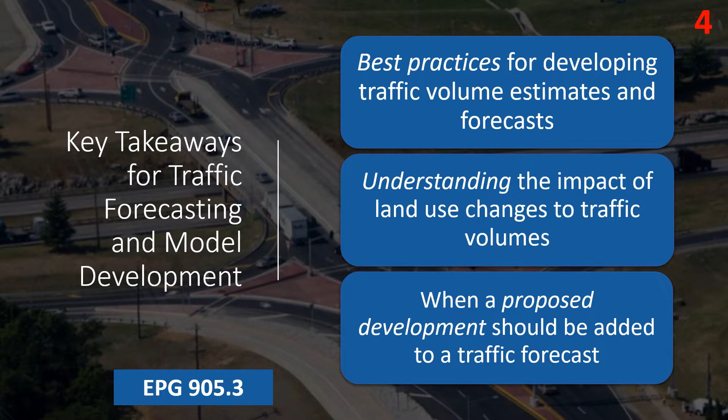To start, you'll need to understand the background of traffic forecasting.

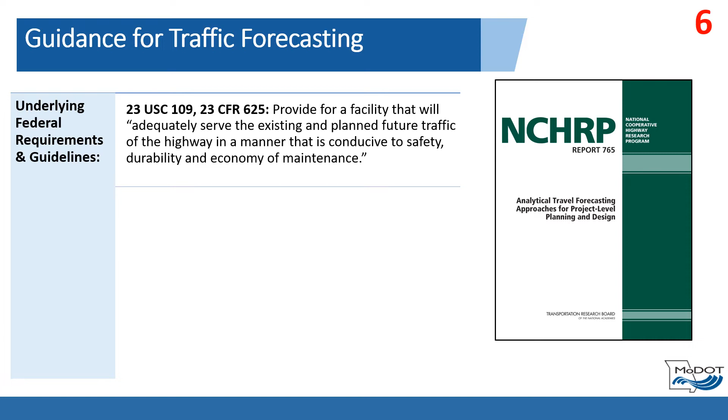Let's focus on a few key national sources for requirements and/or best practices for traffic forecasting, including FHWA and NCHRP. Additional sources are listed at the end of this video. Even more sources are listed in the MoDOT Engineering Policy Guide.

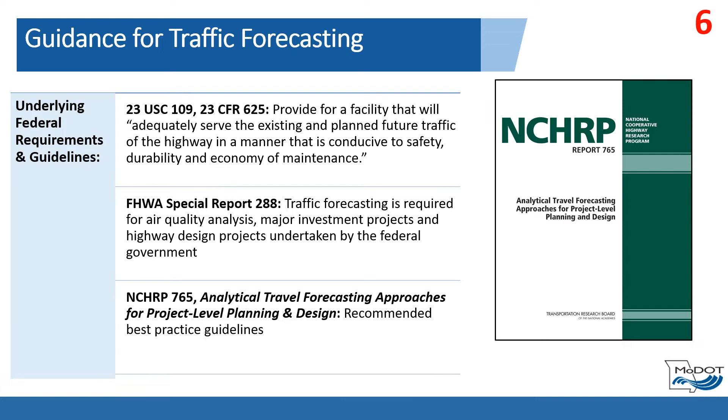Accurate and timely traffic volume estimates are crucial for ensuring the success of transportation projects through each stage, including Transportation Impact Analysis, or TIAs. Traffic volume-based measures deal with the quantity of use of transportation facilities. The quantity can either be calculated at a specific point on a transportation network or between origins and destinations. Demand is associated with a specific time frame anywhere from 15 minutes to a 365-day annual period.

Existing and future traffic volumes are necessary for most transportation projects and can be reported as daily volumes or hourly volumes. Planning and safety analysis projects are examples of project types where daily traffic volumes are needed. Operational analysis projects are examples of project types where hourly traffic volumes are needed.

Traffic forecasts are produced to assess transportation performance under different assumptions about transportation supply and demand. It uses existing traffic volume counts, historic traffic volumes, travel demand model projections, if available, land use plans, and socioeconomic data to predict traffic volumes and traffic flow patterns for a given year in the future.

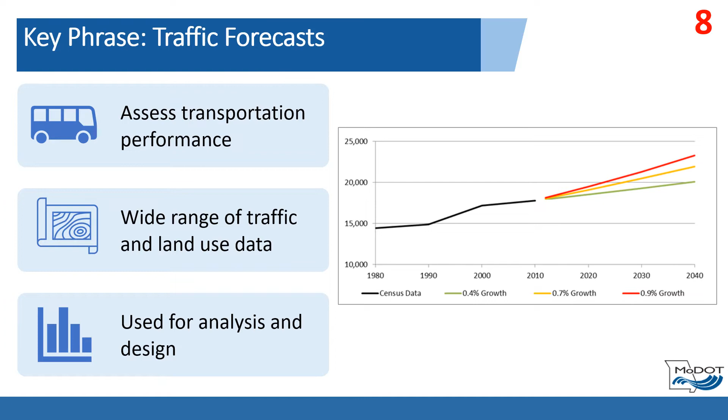Now that we've discussed the background of traffic forecasting, it's time to learn about daily traffic volume refinement.

AADT stands for Average Annual Daily Traffic. It represents the average traffic volume throughout the year considering typical traffic conditions. A true AADT is developed by using a full year of traffic count data, such as data generated from a permanent traffic counter, and dividing by 365 days.

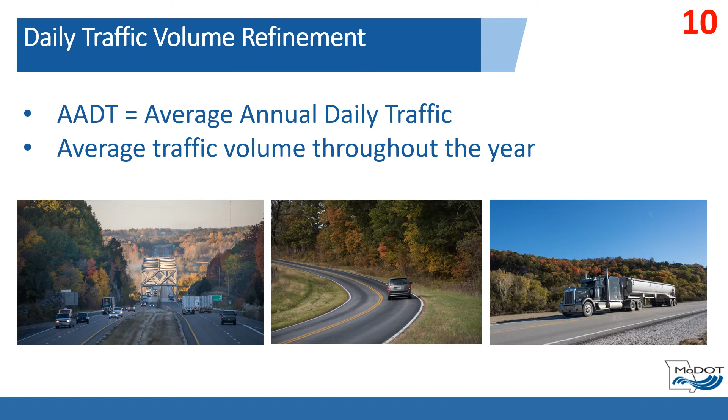However, due to the limited number of permanent traffic counters, short-term traffic counts, usually a 24 to 48-hour period, are often used. When raw short-term traffic count data is collected, it should be processed by factoring it into average annual daily traffic, AADT, using factors that can be requested from MoDOT planning. Short-term traffic count data is converted to AADT by the following steps: applying an axle correction factor, ACF, adjusting to a typical weekday daily volume, and converting to AADT.

Applying the axle correction factor, ACF. If the count method includes vehicle axle data, i.e. tube counts, then an ACF should be used to adjust the axle counts into vehicle counts. An ACF is developed from classification counts by dividing the total number of vehicles by the total number of axles.

Partial weekday adjustment. If partial weekday data was collected, then an adjustment factor is used to convert partial weekday traffic count data to 24-hour weekday daily traffic volume estimates, also known as average daily traffic, ADT. The adjustment factor is representative of the percentage of 24-hour traffic volumes that typically occur on a weekday during the time range specified, for example 6 a.m. to 6 p.m. for a 12-hour traffic count. The adjustment factor usually varies by the type of roadway facility, for example interstate, U.S. route, or state highway.

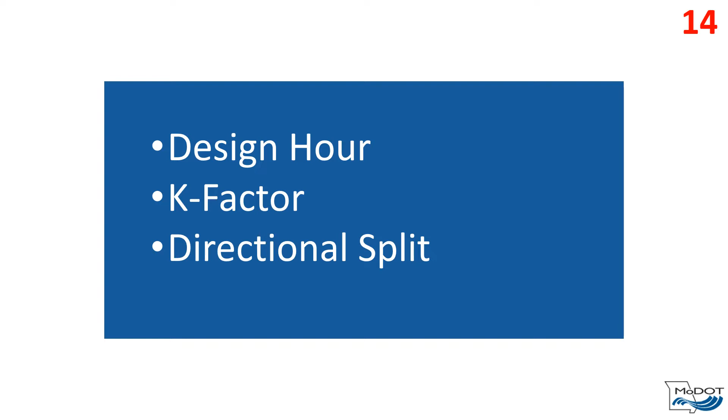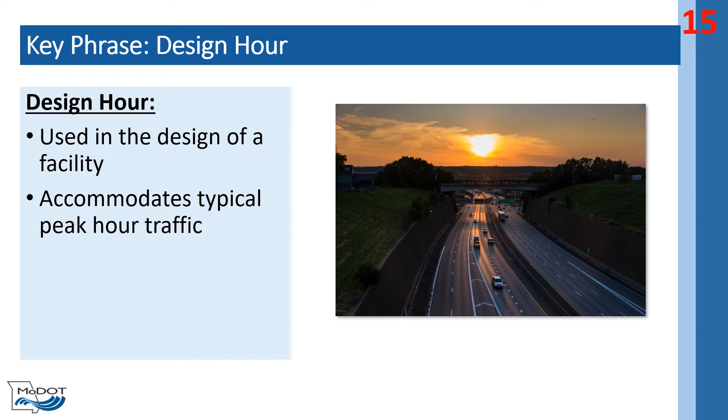The design hour is a high-demand hour with a traffic volume used for designing the geometric and control elements of a facility. Often, this is the same as the AM and/or PM peak hour volume. The design hour selected will allow the designed facility to accommodate peak hour traffic during most days.

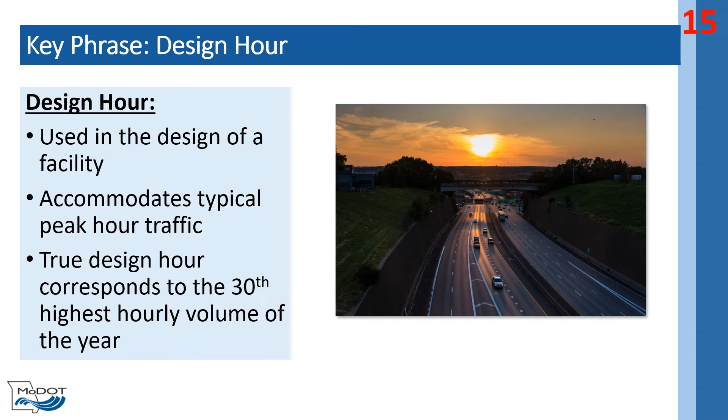The Highway Performance Monitoring System considers the hour corresponding to the 30th highest hourly volume of the year as the design hour, as determined by continuous counters. In absence of continuous counters, local jurisdictions can adjust their design hour based on local facility-specific traffic conditions.

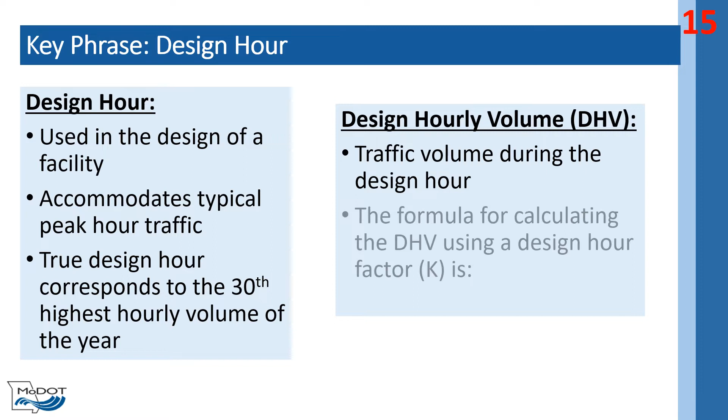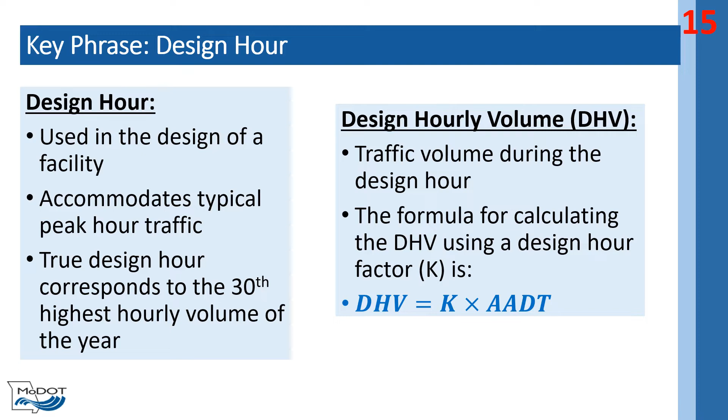The design hour volume, or DHV, represents the volume of vehicles that travel through a segment of roadway during the design hour. The formula for calculating the DHV using a design hour factor of K is DHV equals K multiplied by AADT.

Design hour factor, or K factor. The design hour factor, known as the K factor, is the proportion of the AADT, average annual daily traffic, that occurs during the design hour.

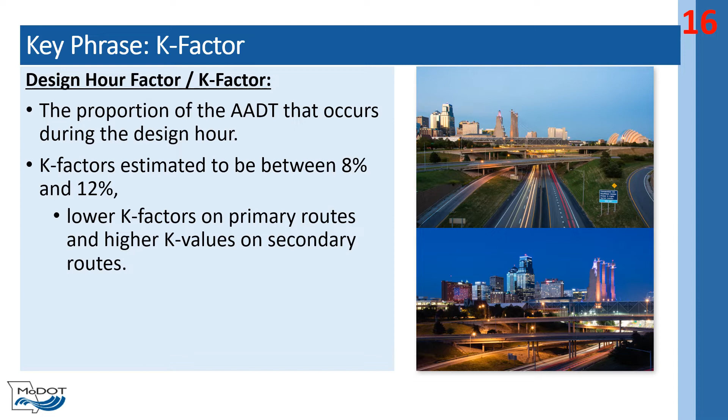K factors are typically estimated to be between 8% and 12%, with lower K factors generally occurring on primary routes and higher K values occurring on secondary routes. In the absence of available traffic data, a planning level estimate of K equal to 10% is sometimes assumed for high-level sketch planning projects. Remember, the formula is K equals DHV divided by AADT.

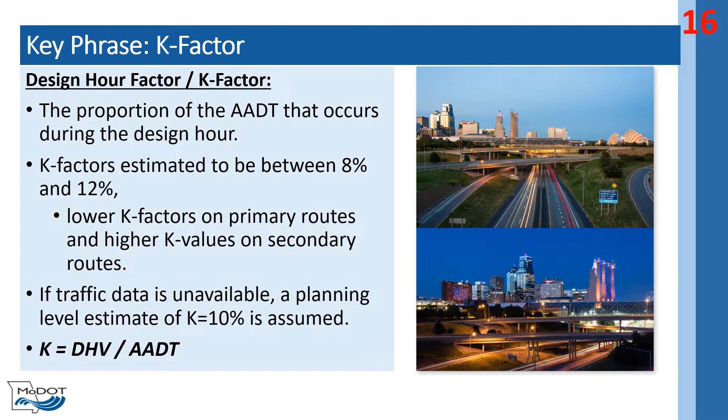Another key consideration is the peak hour directional split, also known as the D factor. This is the percentage of the total two-way peak hour traffic that occurs in the dominantly traveled direction. For instance, a PM peak hour 55% D factor in the eastbound direction on a roadway means that 55% of all drivers in the PM peak hour are headed eastbound.

We discussed the design hour traffic volume refinement, so now we are ready to learn how to balance traffic volumes.

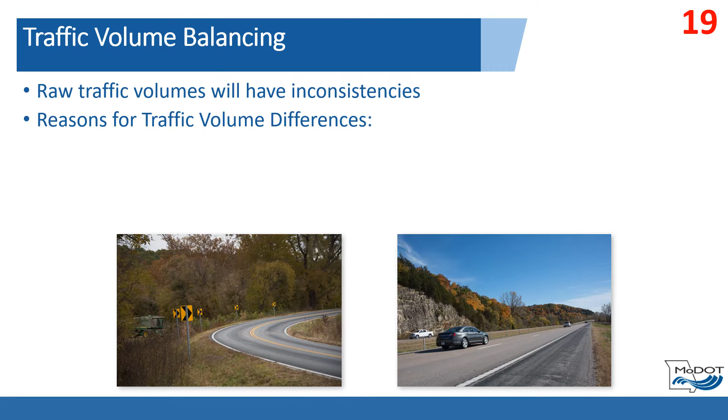It's important to understand that raw traffic volumes along a corridor will have inconsistencies and differences when initially tabulated. Some typical reasons for base year traffic volume differences are other intersecting roadways along a corridor and traffic data collection method variations, for example, data collected on different days, counter error, and unexpected traffic incidents.

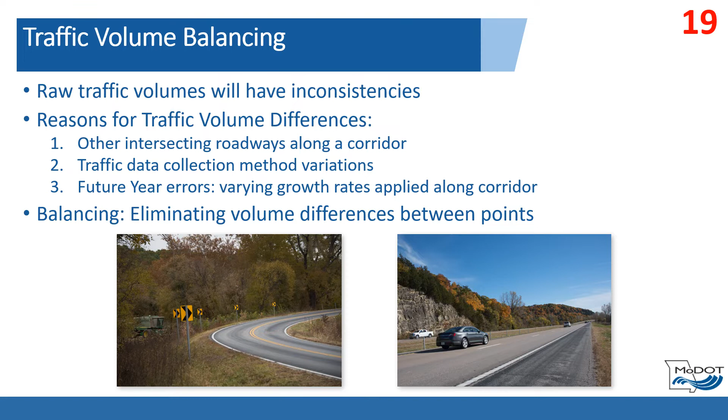Future year traffic volumes will frequently have inconsistencies due to varying growth rates applied along the corridor. So, you will need to consider how to balance this information. In this case, balancing traffic volumes means eliminating the traffic volume difference between multiple points completely.

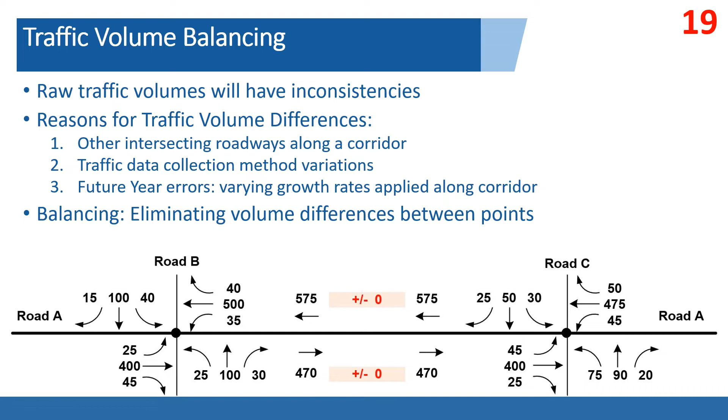For more information, visit the MoDOT Engineering Policy Guide. General rules of thumb are covered on the next slide.

General traffic volume balancing rules of thumb are: understand the locations where data is more likely accurate, defensible, and verifiable by multiple sources. Rely on those data sources to carry forward traffic volumes during balancing. Balance the project's needs between realistic results and efficient calculations. Be context sensitive to the level of analysis being completed and the appropriate level of effort and detail needed for traffic volume development and balancing.

Determine level of error and if new data is needed. If the volumes are off by 10% or more, then review the data to determine if errors have been made in the data collection or processing.

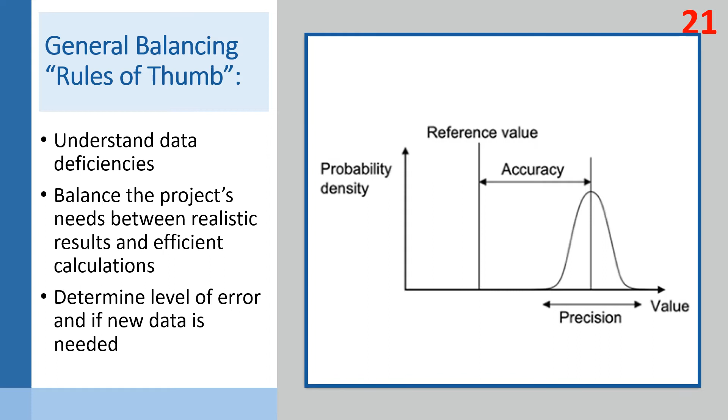Once you have balanced existing traffic volumes, you are ready to start projecting future traffic volumes using different types of traffic forecasting tools.

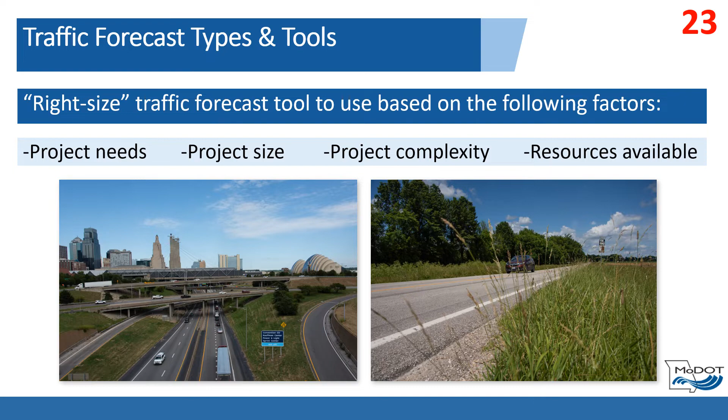It is important to understand the most appropriate tool to use for a traffic forecast. Consider whether it is a planning or design project, and consider the 4 factors listed here. The NCHRP 765 lists the 5 most common forecasting tools.

3 of these tools are growth rates, trend line analysis, and time series analysis. Each of these tools emphasize different things. The growth rate tool applies a constant growth rate over time. Trend line analysis uses historic traffic volume data to generate regression lines. Time series analysis extrapolates trends over time and can be either constant or variable in growth.

These tools should be applied when no travel demand model is available. Historic growth in the study area is stable and expected to remain that way in the future. The project is small and low complexity, and resources and/or time are too constrained for more in-depth analyses.

A potential shortcoming of these tools is that these methods do not naturally focus on the constraining factor of a roadway's capacity.

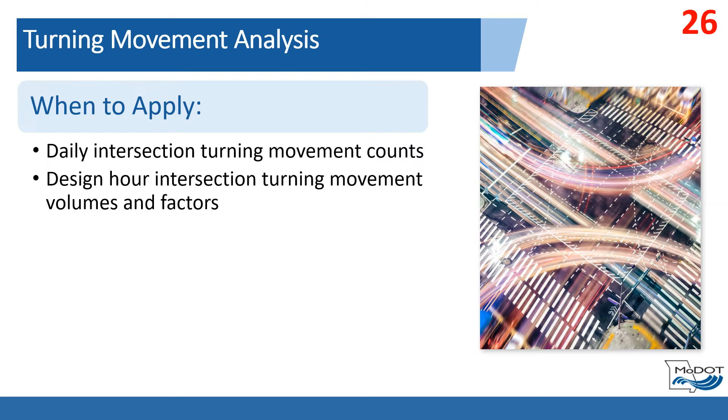Turning movement analysis is the process of analyzing, refining, and balancing turning movement count data for intersections studied as part of a traffic forecast. Apply this analysis when daily intersection turning movement counts are needed and/or design hour intersection turning movement volumes and factors are needed.

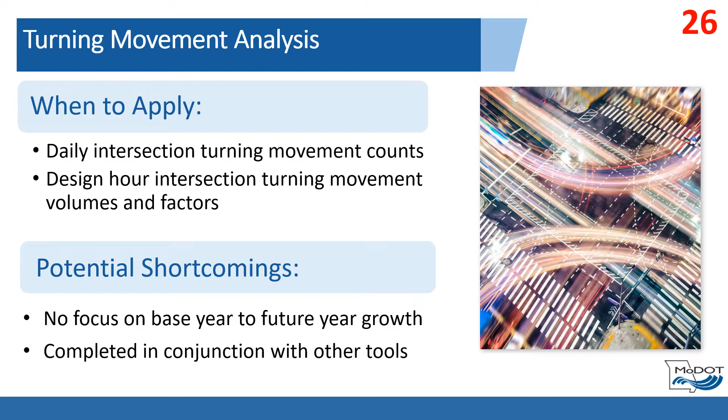A standalone turning movement analysis does not focus on base year to future year growth. Therefore, they are typically completed in conjunction with other tools.

Travel demand models are the preferred tool for developing a traffic forecast if one is available for the study area. A travel demand model represents how choices are made when people travel. It combines a transportation system, or supply, with population and employment information by location, or demand for travel, and often encompasses a wide area, like a metropolitan region.

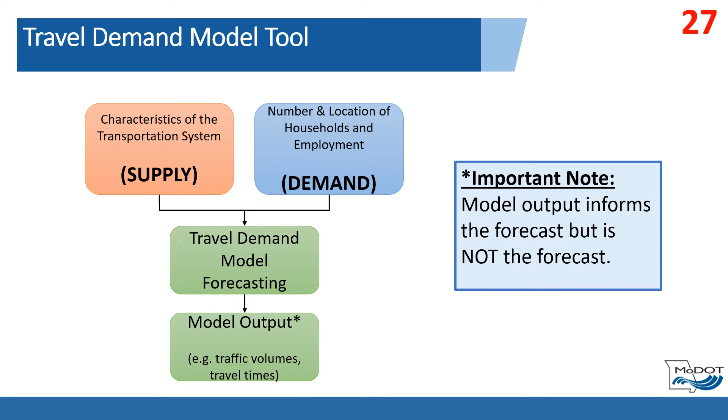It is important to note that a model is used to help develop a traffic forecast, but is rarely used as the forecast. The forecaster should use professional judgment, knowledge of local land use and travel patterns, and other tools to verify model results. Percentage changes from models may be more powerful than raw volumes.

Travel demand models should be applied when a travel demand model is available for a region studied, generally within boundaries of an MPO. Growth in the study area is anticipated to change at varying rates relative to historic growth, and resources and the project schedule allow for model utilization.

Travel demand models have some potential shortcomings. It is not always appropriate for projects of small size and minimal complexity. For example, a small bridge replacement project or site development project may not require a traffic forecast.

A travel demand model can be calibrated for different conditions. For example, it could be developed to capture the accuracy of traffic conditions experienced in the PM peak, AM peak, or throughout the entire day. In some instances, a TDM may be calibrated to 1 or 2 traffic condition settings, but maybe not all. Model users should be cognizant of this when utilizing the model.

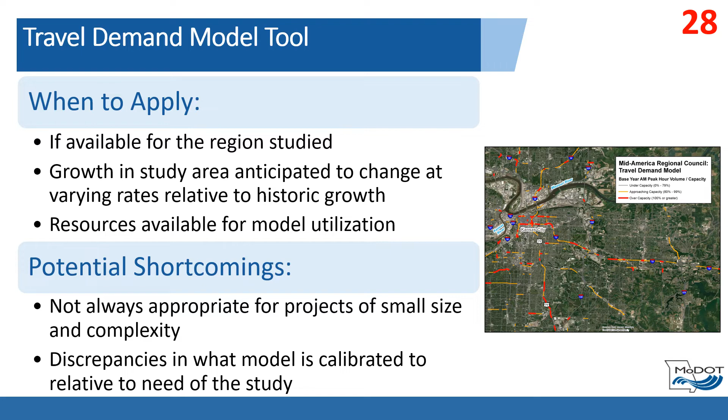There are several tools for developing traffic forecasts. Travel demand models are the preferred tool for developing a traffic forecast if one is available for the study area. Growth rates, trend line analyses, and time series analyses are all similar, but emphasize different things and can be applied when no model is available, growth is stable, the project is relatively small, and resources don't allow for an in-depth analysis. Additionally, turning movement analyses are typically completed in conjunction with other tools, like if approach and departure forecasts are known.

Once you understand the types of traffic forecasting tools available, it is time to forecast traffic volumes.

Before you begin the forecasting process, it is important to discuss the selected approach up front with the reviewer. It is important to establish expectations at the beginning and maintain constant communication and collaboration throughout all application steps. This is covered in more detail in the Project Needs and Scoping module.

The development of traffic forecasts includes the following steps: collect and review data, develop base year no build or existing volumes, develop annual growth rate, develop future year no build forecast, develop base year and future year build forecasts, coordinate and review, and document.

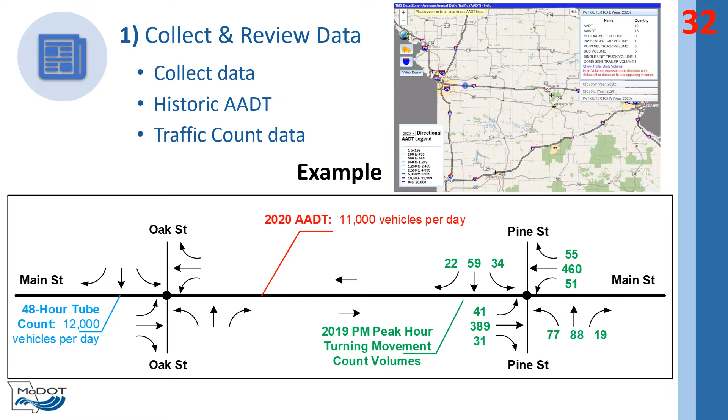Step 2 is developing base year no-build traffic volumes. This step includes developing intersection turning movements, determining design data such as K and D factors and heavy truck percentages, and balancing traffic volumes between multiple intersections.

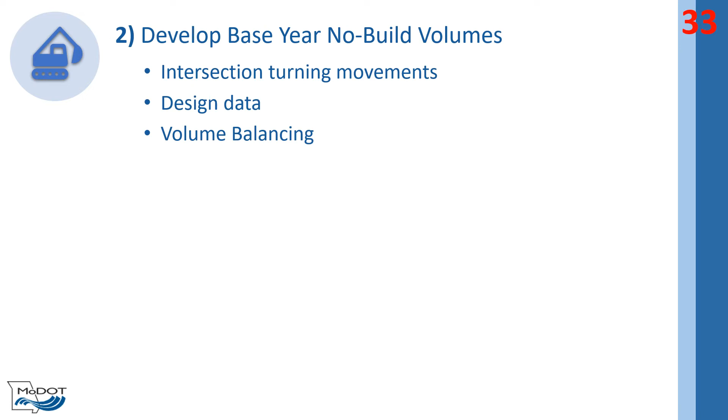In the Main Street example, 2019 PM peak hour traffic count data was collected at Main Street's intersections with both Oak Street and Pine Street. The data was compared to the historic data and then refined so that the traffic volumes balanced on Main Street between the two intersections.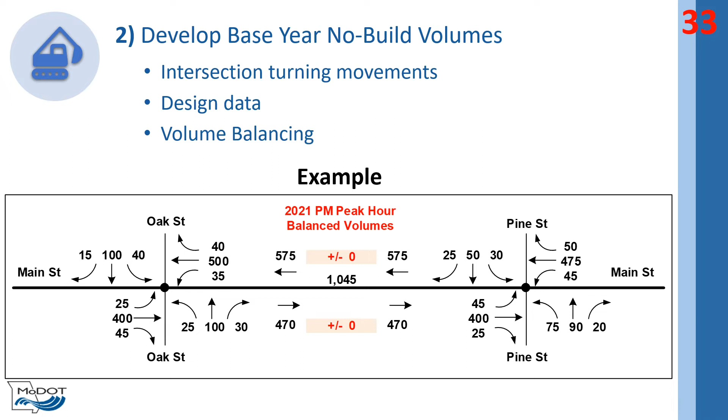Step 3 is developing the annual growth rate using a travel demand model if available. This consists of reviewing the model validation, comparing the existing model traffic volumes to actual project AADT estimates, reviewing the transportation network, ensuring accuracy of the model base year network relative to the actual transportation network, checking that all fiscally constrained MTP projects as identified by an MPO are included in the model's future year network, and calculating model growth, typically by dividing the future year model volume by the base year model volume.

In the Main Street example, the compound annual growth rate was calculated between model traffic volumes in the model's base year scenario, 2018, and the model's future horizon year, 2045. This growth rate was then compared to a 10-year AADT historic trend line estimate for reasonableness. The model annual growth rate was 1.6%, and the historic trend line growth rate was 1.42%.

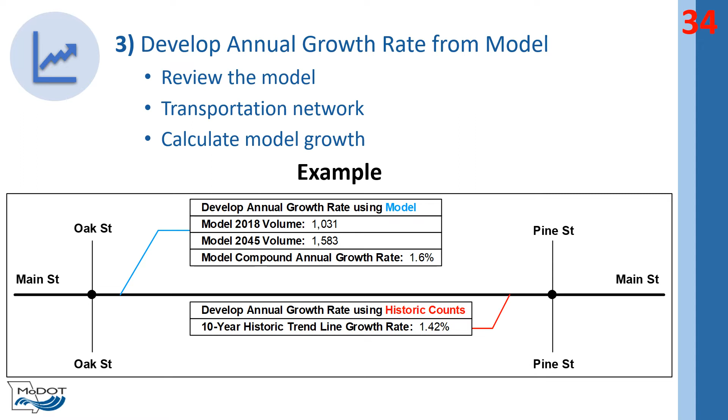Step 4 is developing the future forecast. Consider both model and historic AADT growth to determine and apply a growth rate to the base year no-build traffic volumes to estimate future year no-build traffic volumes. Then, review and adjust traffic volumes based on knowledge of future land use, professional judgment, and necessary volume balancing.

In the Main Street example, a selected growth rate of 1.5% was determined based on the model, discussions with local planners and MoDOT, comparisons to other data sources, and engineering judgment. This selected value was applied to the 2021 balanced volume to estimate a 2045 future year no-build traffic volume of 1,494 vehicles in the PM peak hour. This was then adjusted to 1,500 vehicles during the process of balancing intersection traffic volumes.

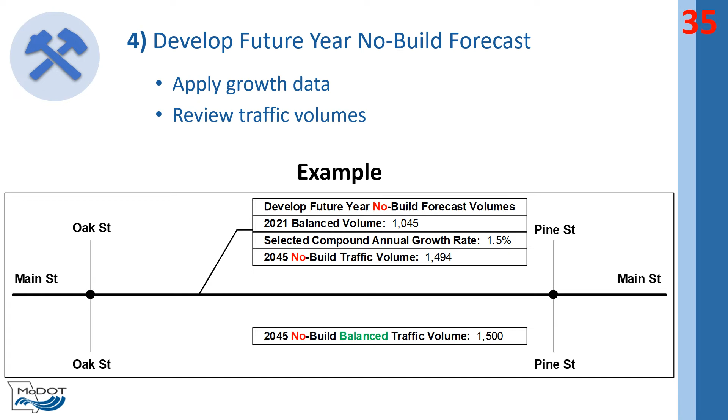Step 5 is developing base year and future year build forecasts. Utilize the travel demand model when available to determine diversion and/or growth rates on the transportation network in the study area. In areas without a model, use context-sensitive assumptions for the study area that are well documented. Apply the diversion to the no-build scenarios or the growth to the base scenarios to estimate build scenario volumes. Review and adjust traffic volumes based on knowledge of network changes, professional judgment, and to maintain reasonable corridor traffic volume balancing.

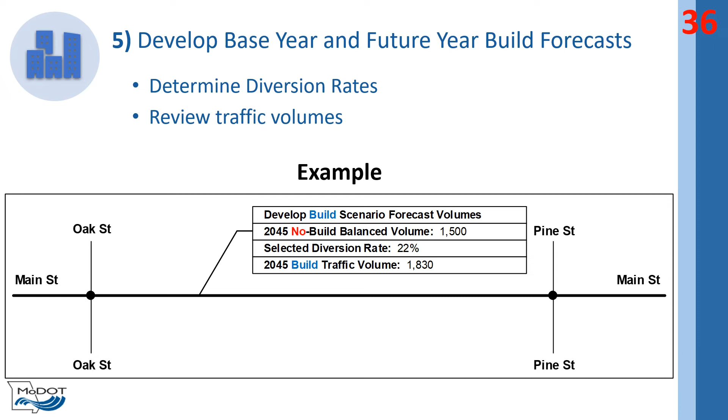In the Main Street example, the model's diversion rate of 22% was applied to the 2045 future year no-build balanced volumes to estimate a build scenario traffic volume. This would assume that the completion of the project would lead to a 22% increase in traffic volumes on Main Street.

Step 6 is coordinating and reviewing. Coordinate with all appropriate parties and provide a review period to ensure that reasonable forecast assumptions are made. Refer to the MoDOT TIA Methods and Assumptions template available in the MoDOT Engineering Policy Guide 905.3 for appropriate parties to consider. In the Main Street example, the 2045 build traffic volume was adjusted during the MoDOT review process.

MoDOT was able to remind the analyst of an anticipated development in the vicinity that would lead to an estimated 60 extra trips in the PM peak hour. This development was not included in the model, which is why it needed to be accounted for as an aside.

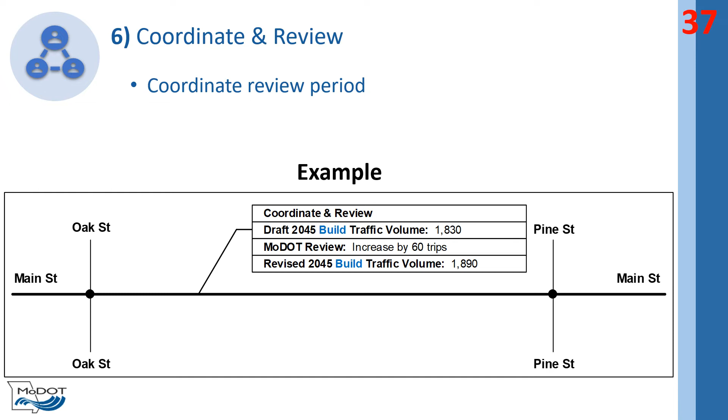The last step of the forecast application, Step 7, is documenting the forecast using a combination of figure diagrams and a report to explain all assumptions made. Refer to the MoDOT Methods and Assumptions Report checklist for topics to be included in the documentation. The checklist is available in the MoDOT EPG 905.3.

Once you understand how to forecast traffic volumes, you can apply that knowledge to forecast volumes for a TIA.

TIAs are engineering studies that compare before and after traffic conditions on road networks due to proposed roadway network and/or land use changes. This section focuses on project-level forecasts that are primarily developed to support the creation of TIAs.

The forecasting, scoping, and application steps of a TIA forecast will be similar to the forecasting steps listed on previous slides. However, additional focus should be provided on identifying potential new development traffic to add to the forecast.

Exhibit 1 is provided on the next slide to help guide the user if a development should be added to the forecast.

This decision flowchart is provided to help guide the user through the decision process if a forecast should be generated for a development. A larger version of the displayed Exhibit 1 decision flowchart is provided in the MoDOT Engineering Policy Guide. The flowchart asks key questions to determine if a development should be included in a forecast.

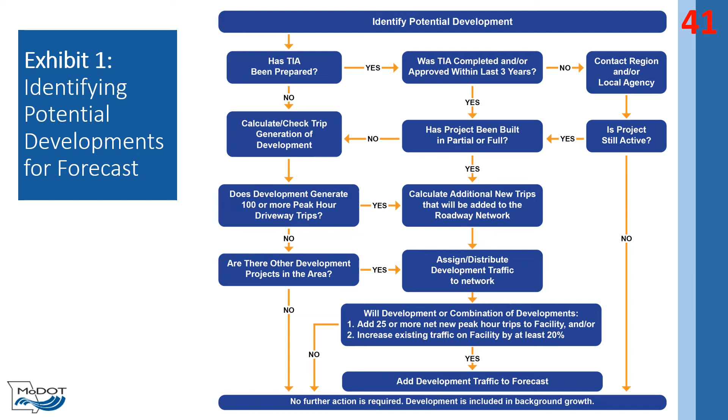To determine the impact that proposed developments will have on future traffic conditions, it is important to identify how development trips will be generated, distributed, and assigned on the roadway network. The following 5 steps are used to make this determination: assessing trip generation potential, determining mode split, estimating the generated trip types, distributing trips, and assigning trips.

Step 1 is to assess trip generation potential. The most commonly accepted source for trip generation data on land use development is the ITE Trip Generation Manual. The ITE Trip Generation Manual includes trip generation characteristics of a wide variety of land use types. Trip generation characteristics for these land use types were developed based on studies completed from the year 1980 till now.

Use the following steps to assess trip generation potential using the ITE Trip Generation Manual. Select an independent variable, such as the number of dwelling units, the number of residents or employees, or the square footage of businesses. Select an estimation time period.

Typically, the AM or PM peak hour is selected. However, daily, weekday, Saturday, or Sunday values can also be chosen. Identify the setting of this development. Typically, general urban, suburban is the default setting.

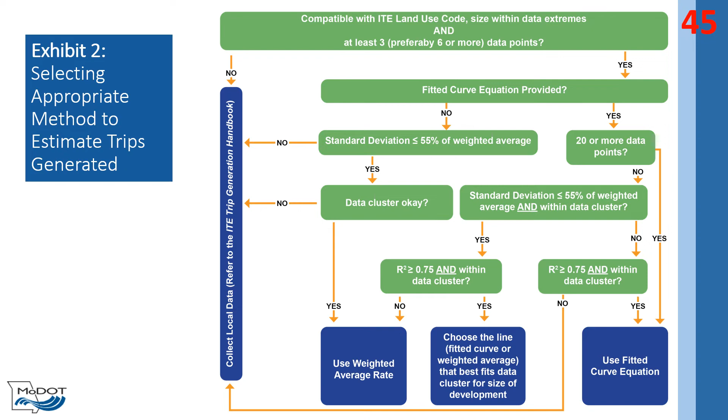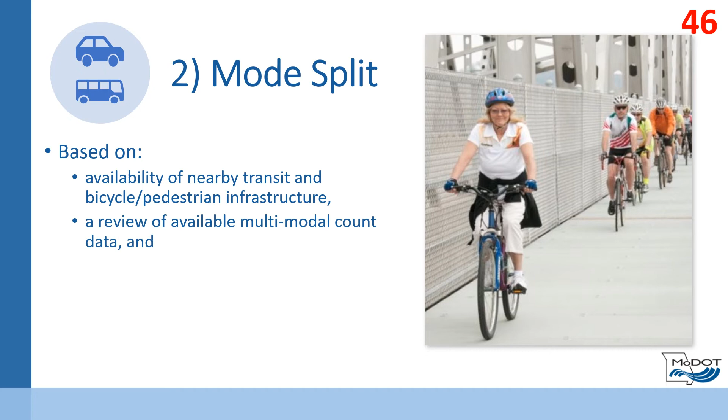The second step in forecasting a TIA is mode split. The selection of trip mode choices should be informed by the availability of nearby transit and bicycle pedestrian infrastructure, a review of available multimodal count data, and coordination with local planning and engineering partners. Mode choice assumptions should be well documented in the final TIA.

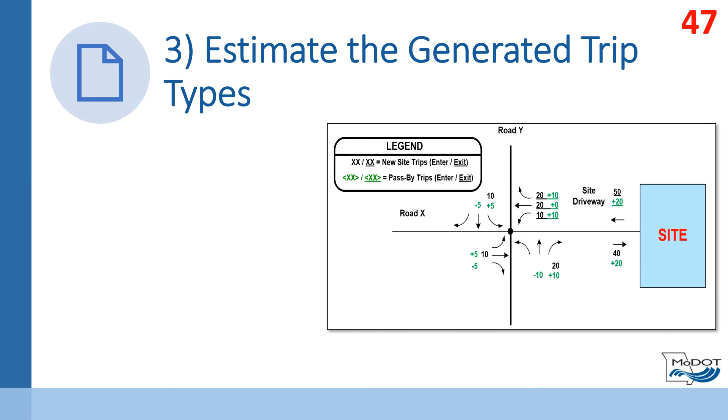The third step is to estimate the generated trip types. The type of trips generated should be considered as part of the trip generation process. The total trips generated are determined, and then the internal trips, pass-by trips, and diverted link trips are subtracted to calculate new trips. New trips are primary trips that are made for the specific purpose of visiting the development.

This trip type usually travels from an origin outside of the development to the development and then returns back to the origin. Trips that are made as intermediate trips on the way from an origin to a primary trip destination and do not require a route diversion from another roadway are called pass-by trips. Pass-by trips are new at the site driveway, but are not new on the adjacent roadway.

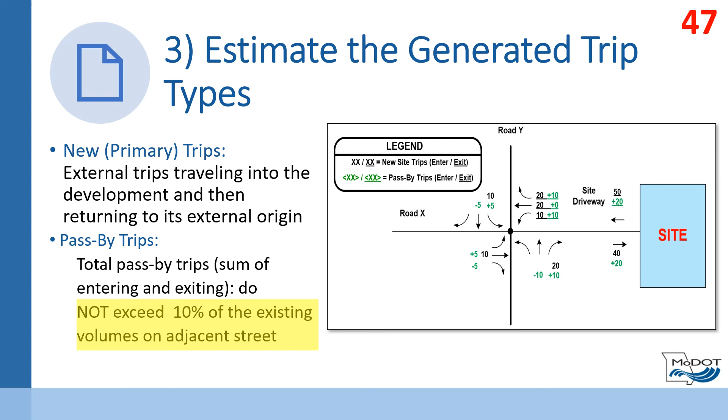It is recommended that pass-by trip percentages should only be applied to land uses numbered in the 800s for retail and 900s for services. Total pass-by trips should not exceed 10% of the volume on the adjacent street. For multi-use developments, pass-by percentages should be applied only to the retail component.

An internal trip is a trip that both originates and ends within the development. Internal trip rates will vary depending on the proposed land use type, size, and the context of the surrounding area. For instance, a mixed-use development in an urban area would likely have a higher internal trip rate than a typical commercial development in a rural area. Internal capture rates may be estimated using an automated worksheet tool in the NCHRP 684.

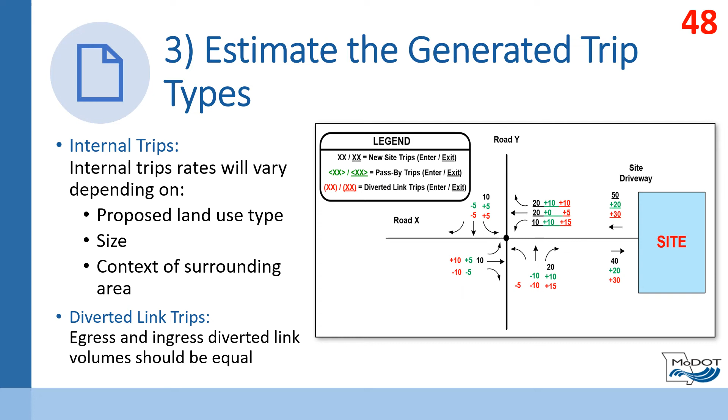Diverted link trips are similar to pass-by trips in that they are attracted from nearby existing traffic. However, diverted link trips require a route diversion to a different roadway to reach the development, and they should be estimated only if reliable data on the percentage distributions of the three trip types—primary, pass-by, and diverted link—are available for the land use being considered. It is recommended that travel routes for diverted trips be clearly established. Typically, the ingress and egress diverted link volumes are equal.

The fourth step is trip distribution. The existing traffic patterns method is used for most TIA projects. This method derives trip distribution percentages based on existing data or data at sites that are comparable to the subject development. It should be applied using the ITE trip generation manual and existing traffic counts, combined with local knowledge of traffic patterns and land use.

Other methods to be aware of, though not common for traditional TIAs, are the gravity model and socioeconomic data methods. These methods focus on traffic patterns from a regional and sub-regional perspective and are usually part of a complex computer model.

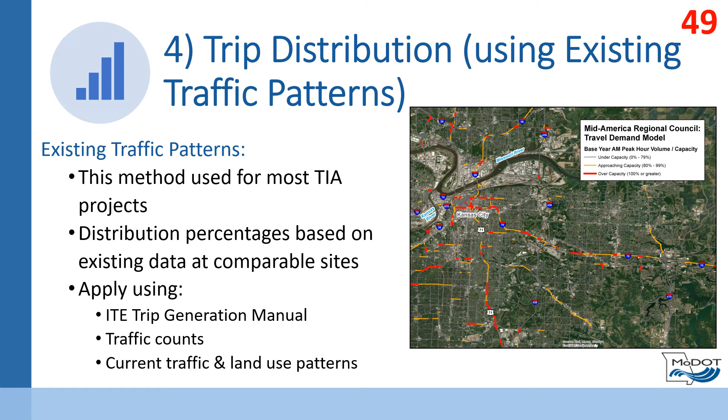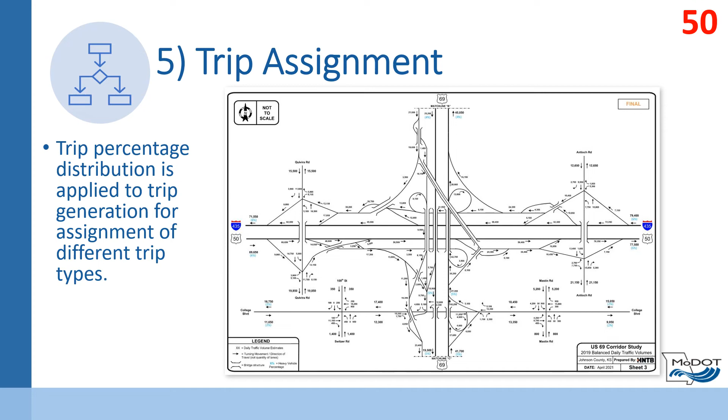The fifth and final step of forecasting TIAs is trip assignment. Trip percentage distribution is applied to the trips generated by the site for assignment of different trip types. Refer to the example on the following slides.

You are now ready to review a TIA volume development example using the previously discussed topics. In this example, a new site will be connected to the intersection of Road X and Road Y by a new site driveway. In this first step, the new or primary trips will be calculated on the roadway facilities.

In this example, the westbound to northbound right turn movement includes the following numbers and assumptions. The trip generation of the total outbound primary trips is 50, from the ITE trip generation manual. The trip distribution of the outbound right-turning primary trips is 40%, developed from existing traffic patterns as well as collaboration and communication with local planners and engineers. Based on these values, the trip assignment is 20 primary site trips that will make the westbound right turn.

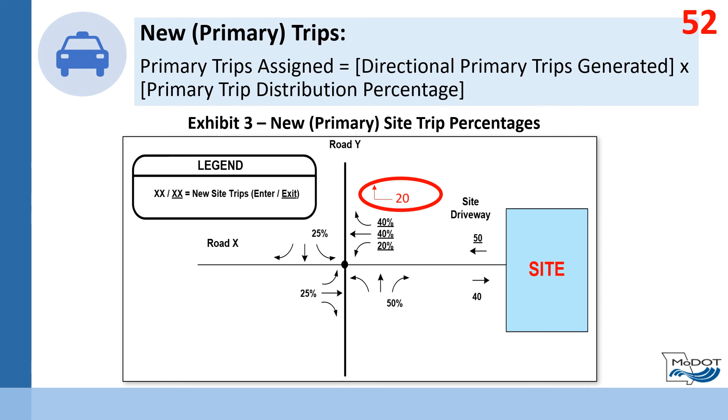This slide displays the calculated assignment of primary trips for all applicable turning movements at the intersection of Road X, Road Y, and the site driveway, using the method previously discussed.

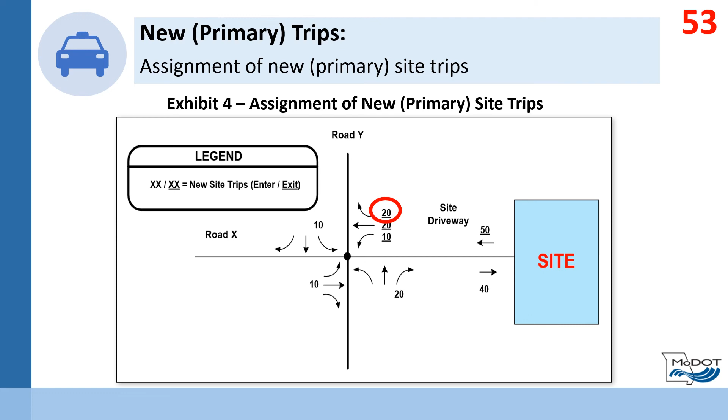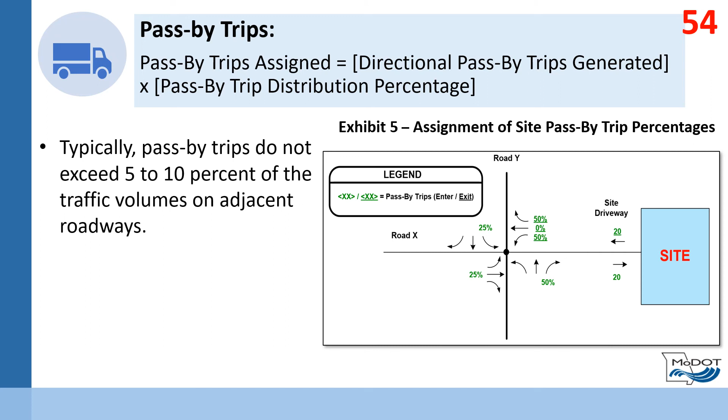Pass-by trips are then identified for the roadway facilities. Exhibit 5 displays sample pass-by trip percentage assumptions. Typically, pass-by trips should not exceed 5 to 10% of the traffic volumes on the adjacent roadways. The egress and ingress pass-by volumes are usually equal.

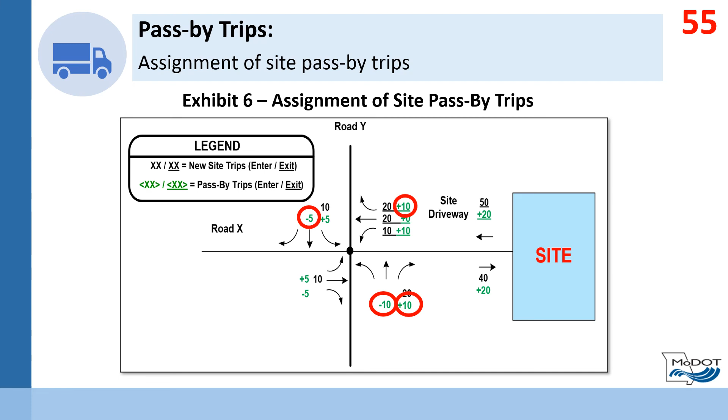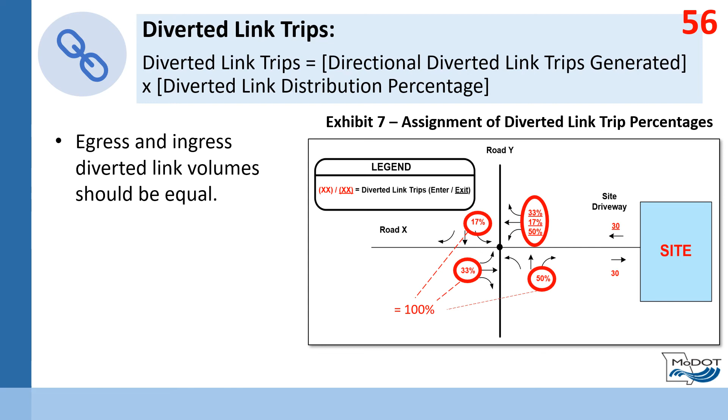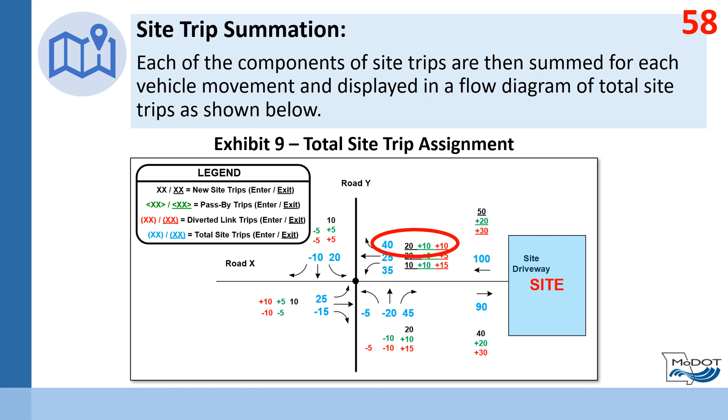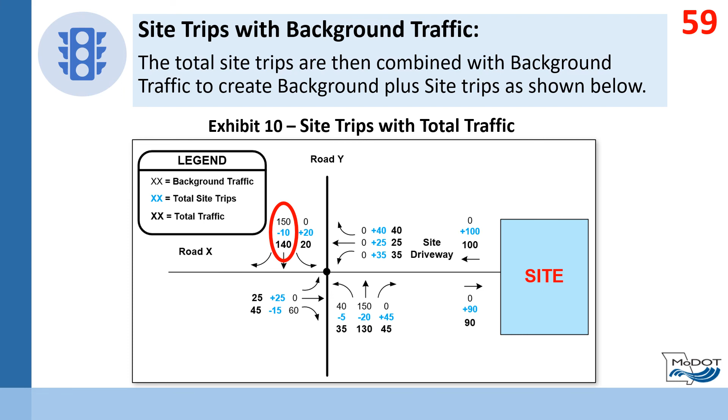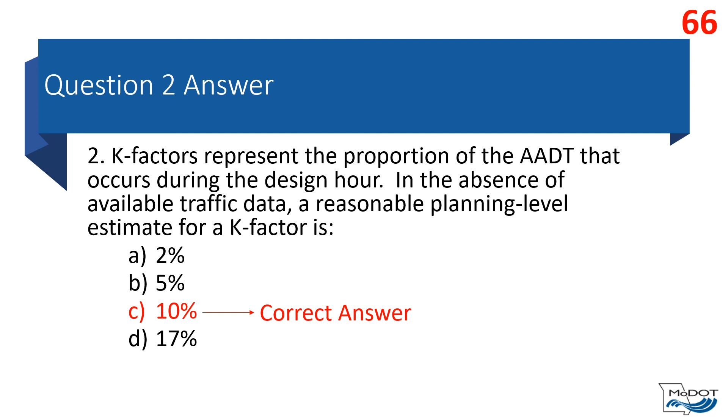K-factors are typically estimated to be between 8% and 12%, with lower K-factors generally occurring at primary routes and higher K values occurring on secondary routes. In the absence of available traffic data, a planning level estimate of K equals 10% is sometimes assumed, for higher level sketch planning only.

Before you begin the process, always discuss the selected approach up front with the reviewer. It is important to establish expectations at the beginning and maintain constant communication and collaboration throughout all application steps. This is covered in more detail in the Project Needs Scoping module.